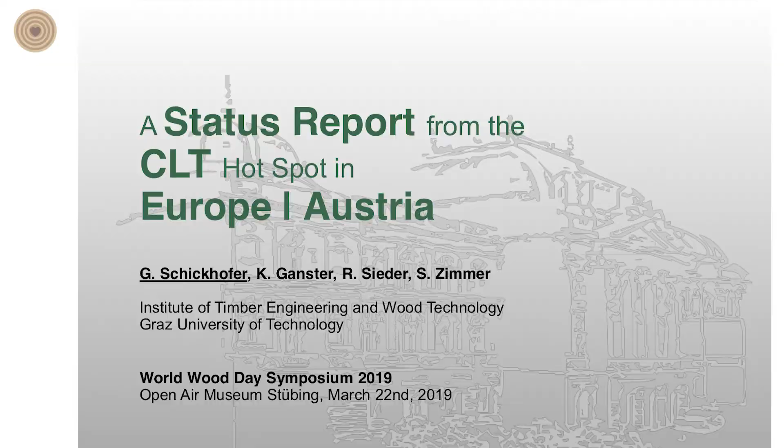I would like to show you the content of my presentation. First, I would like to talk about timber at Graz University of Technology, some R&D topics, then a few facts and data about CLT. Then I'd like to show some selected projects regarding the use of CLT, standardization work, and also what we are doing currently on different projects. Last but not least, I would like to make a summary on future prospects.

When I talk about the University of Technology, we have to consider that we have 7 faculties at our university, with approximately 14,000 students and a staff of 3,350. The current budget is in the range of 225 million euros.

Our Faculty of Civil Engineering and Civil Engineering Sciences consists of 15 institutes with approximately 1,400 students, and one of these 15 institutes is my Institute of Timber Engineering and Wood Technology. This was founded as Chair for Timber Engineering in the year '91, and then in 2004 we became the status of an Institute of Timber Engineering and Wood Technology.

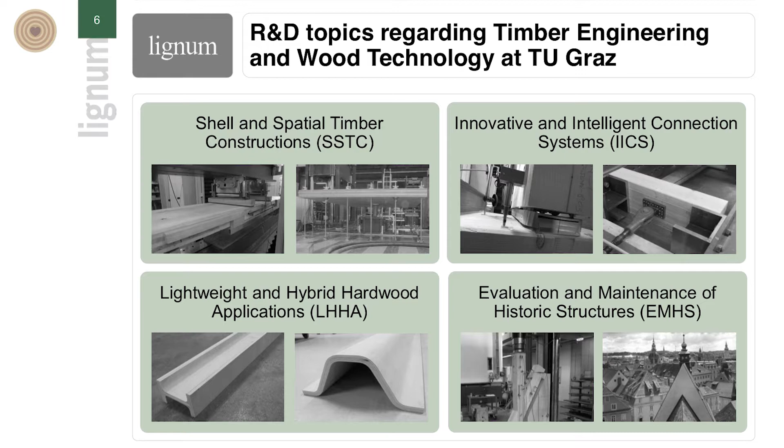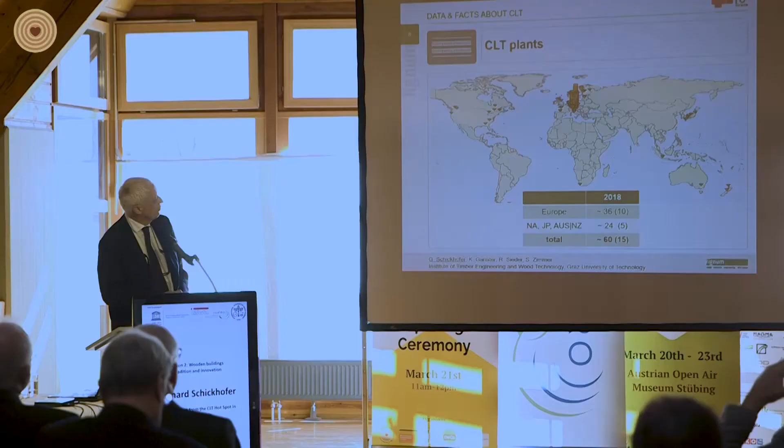Now let's talk about CLT—a few facts. Regarding CLT plants, currently we are talking about 60 plants worldwide, and 15 of these 60 plants are in process or in planning. You can see this focus of this hotspot here in Europe.

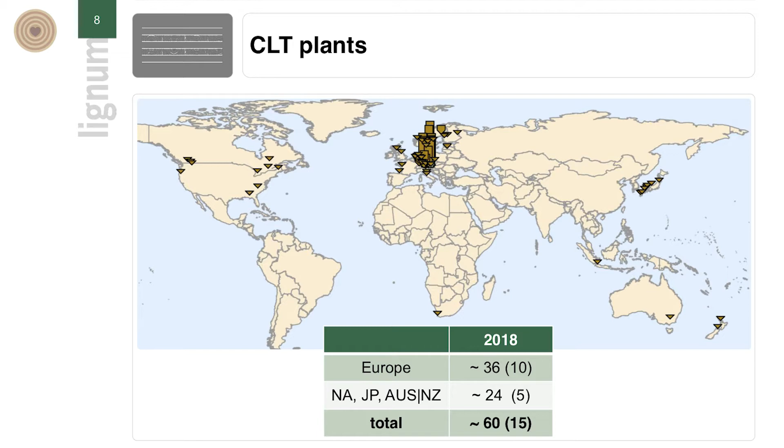The CLT production amount is really fast increasing now. In the early '90s we had kind of a niche product, then we had the market entry of KLH between 1995 and 2000. One of the most important facts was the market entry of different producers in Austria between 2005 and 2010—for example, Stora Enso, Binder Building Systems, and Mayr-Melnhof. I think currently we are in a status where we can talk about a mass product now.

In 2018 we reached this 1 million cubic meter production amount, and sooner or later, I think, we'll also reach this 1.25 million cubic meter production amount of CLT by the end of 2020.

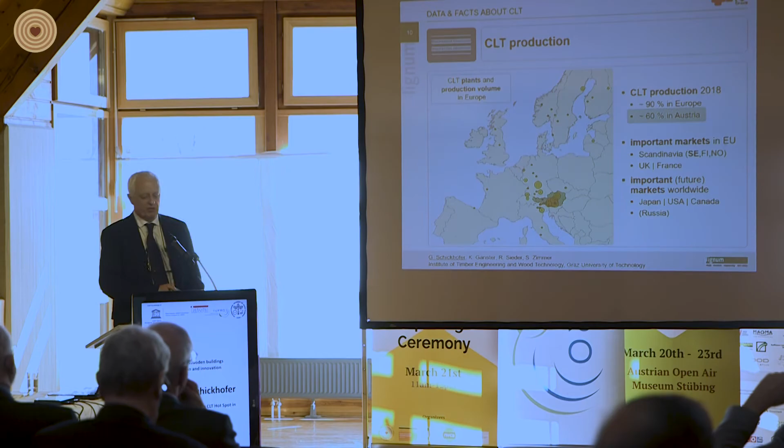Now, what's happened in CLT regarding the production situation in Europe and worldwide? You can see this hot spot here in the German-speaking countries. The current situation is that we have 90% of the whole production in Europe, and 60% in Austria.

For us, important markets in the European community are Scandinavia, especially Sweden—we have a lot of activities there—also Finland and Norway, and of course the UK and France. Important future markets worldwide, here we can talk about Japan, USA, and Canada.

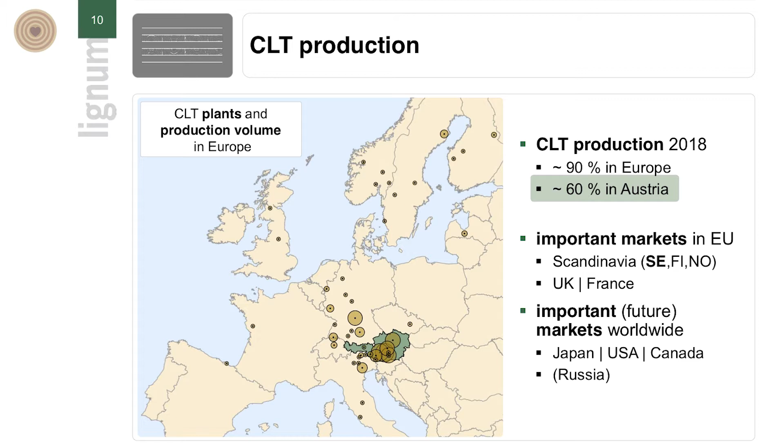I was in Japan two weeks ago, and it was really impressive. They are really on a fast forward way to also implement CLT production lines there. And we are also in contact with Russian companies.

Now let's talk about CLT, and I'll also explain the shortcut of CLT. But first, let's talk about the standardization work. Why do we need standardization work on cross-laminated timber? This is important because we have to consider a wider use of CLT products in our building sector.

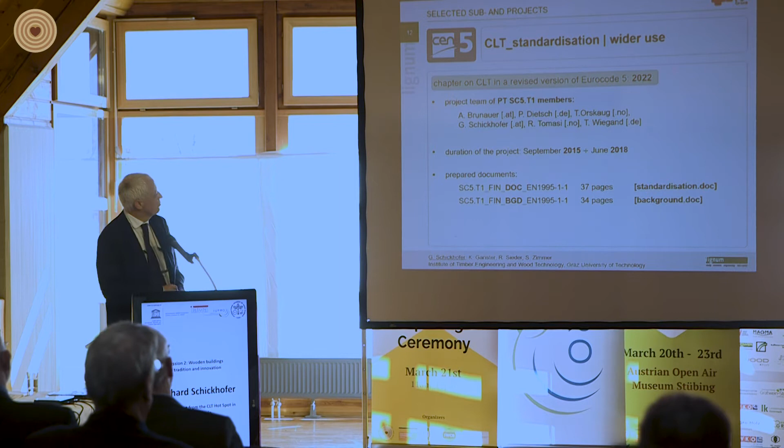The European community decided to have a chapter on CLT in a revised version of Eurocode 5 in the year 2022. That was the reason why a project team was founded, consisting of 6 colleagues - 2 from Austria, 2 from Norway, and 2 from Germany. They prepared 2 documents, a standardization document and a background document. All in all, we are talking about 70 pages with explanations and important information for engineers and architects on CLT.

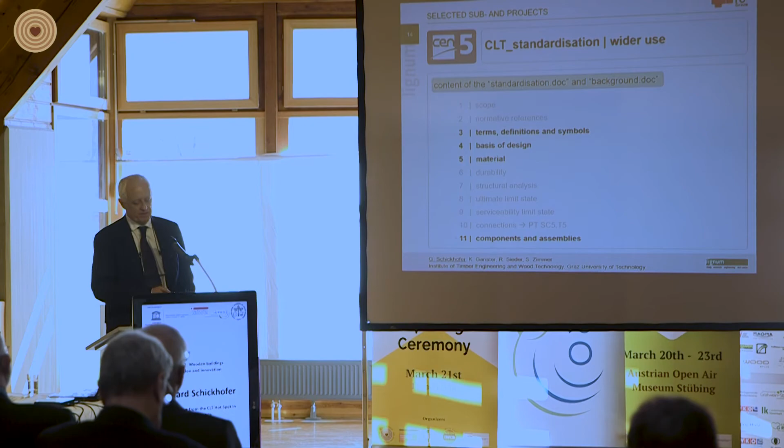Now I would like to talk about 4 chapters in a bit more detail: terms, definitions and symbols; basis of design; material; and components and assemblies.

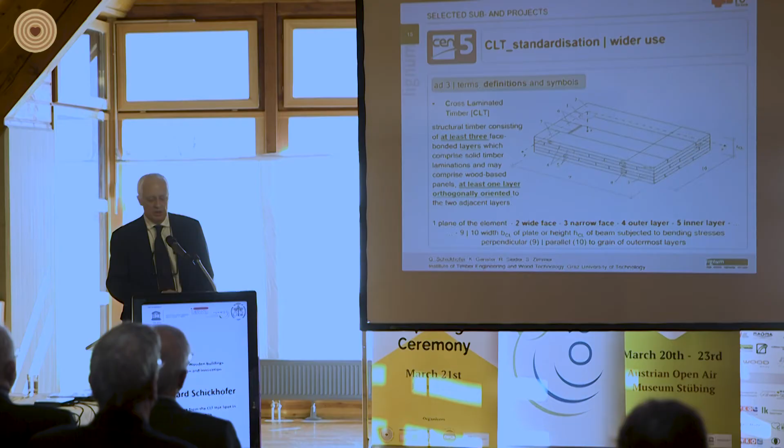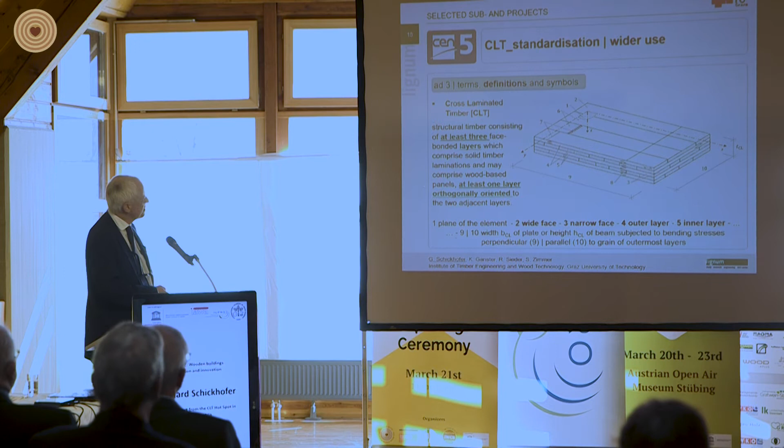Terms, definitions, and symbols - what is CLT now? Cross-laminated timber is a structural timber consisting of at least 3 face-bonded layers which comprise solid timber laminations and may comprise wood-based panels, with at least 1 layer orthogonally oriented to the 2 adjacent layers. What we can see here is the wide face, the narrow face, and we also have outer layers and inner layers.

So what is important for the engineer? For the engineer, we have 1 chapter called Basis of Design - this is really important to know. We have to consider a safety partial factor in the European standard called gamma M for CLT, which is in analogy to GLT, and we choose this factor as 1.25.

Then, regarding the materials, for ultimate limit state design we also have to consider load duration and moisture influences on our product. We use the K-mod factor, the modification factor, which is really important, and this is also in analogy to glued-laminated timber.

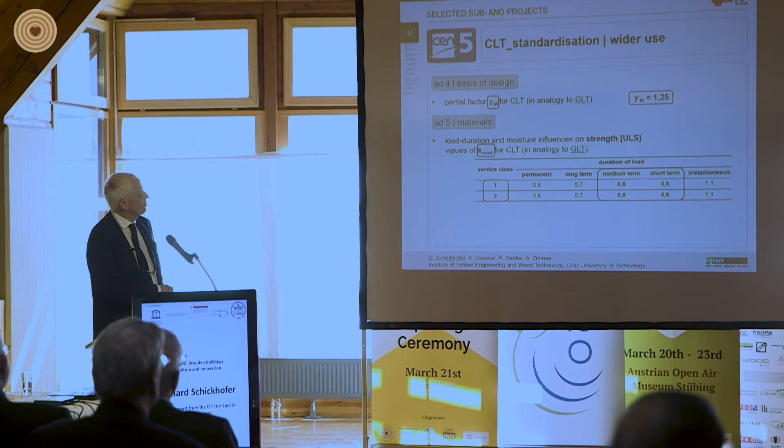We consider service classes and duration of load classes. For medium-term and short-term loading classes, we have a factor between 0.8 and 0.9, which is a modification and reduction factor of strength values. Then we also have to consider load duration and moisture influences on deformation.

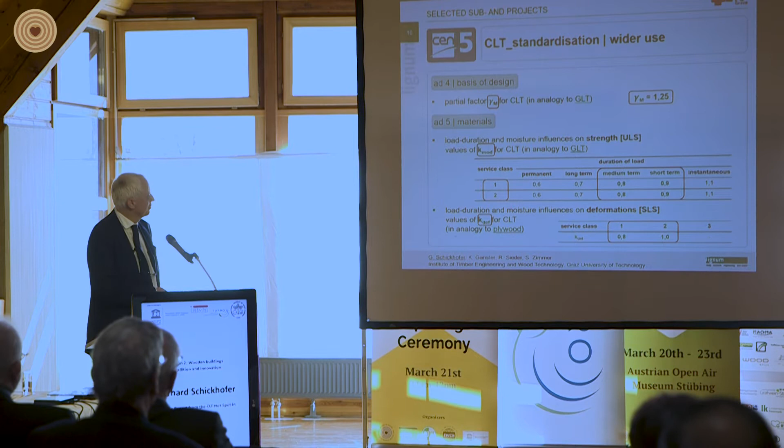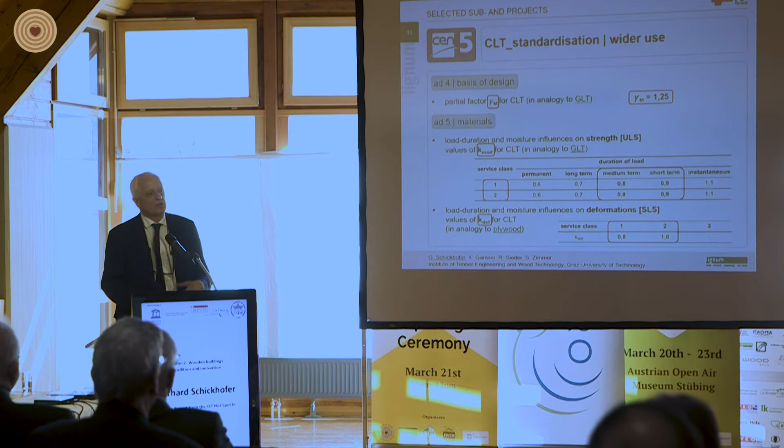This is a serviceability limit state process, and here we have the K-def factor. The K-def factor is in line with plywood - this makes sense because plywood is also a product with orthogonal layers, so deflection is more or less similar to CLT. In fact, in the US or Canada, CLT is very often named jumbo plywood - that's a really interesting wording.

Here we have this deformation factor, also considering or depending on service class 1, 2, and 3. We have factors between 0.8 and 1.0, which relates to deflection based on creep.

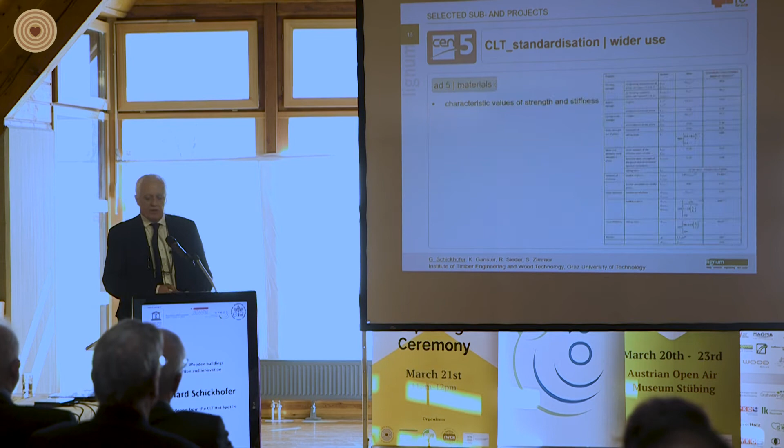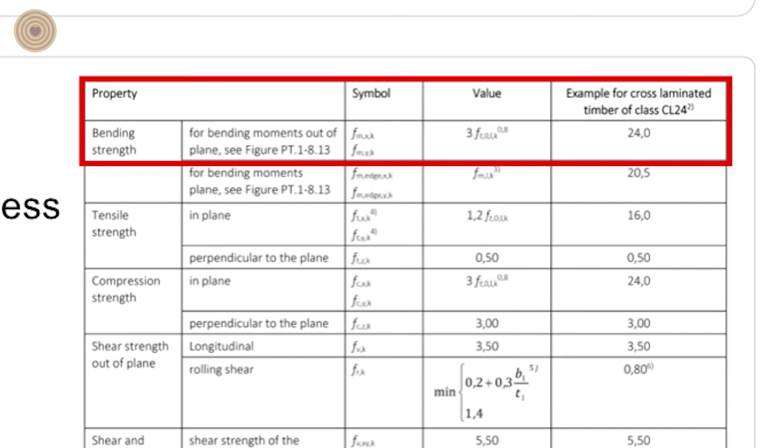Now some words about materials. When we talk about materials, we have to consider a strength class system - this was a very long open question for CLT. In the new standard, you will find all the characteristic values in a very important table of strength and stiffness values. You can see it here.

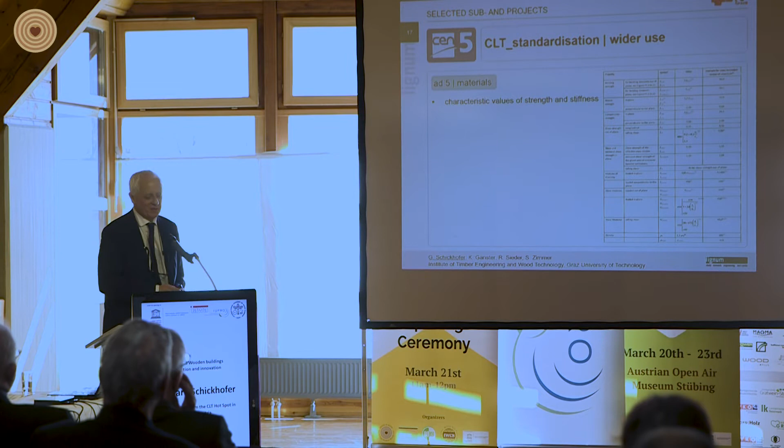I'm not able or willing to explain all these values in detail, but I would like to focus on the bending strength. This is the most important characteristic value when we talk about the strength class, because the definition of a strength class is given here. We call our strength class system in Europe CL24 - CL means cross-laminated, and 24 means the bending strength out of plane.

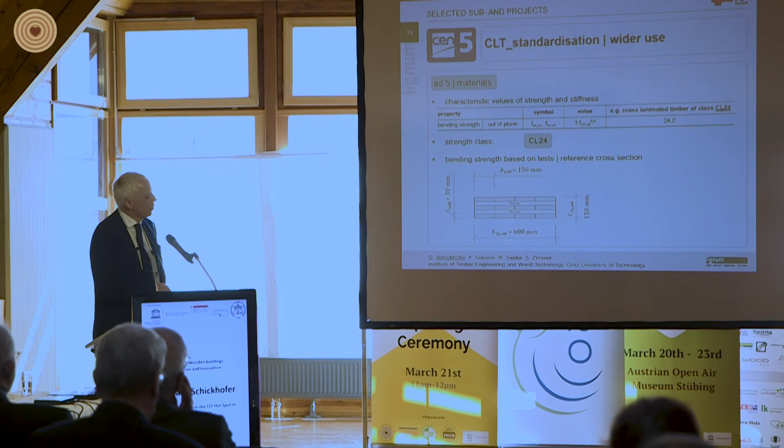How can we get this information? We have to do bending tests on our reference cross-section, which is given here with a width of 600 millimeters, a minimum of 4 laminations acting parallel, and a height of 5 times the reference thickness of 1 lamination. This is the reference cross-section, and if we want to know the capacity of a panel, we have to perform this test on this reference cross-section. The other possibility is to use a load-bearing model, which is very common in different product standards.

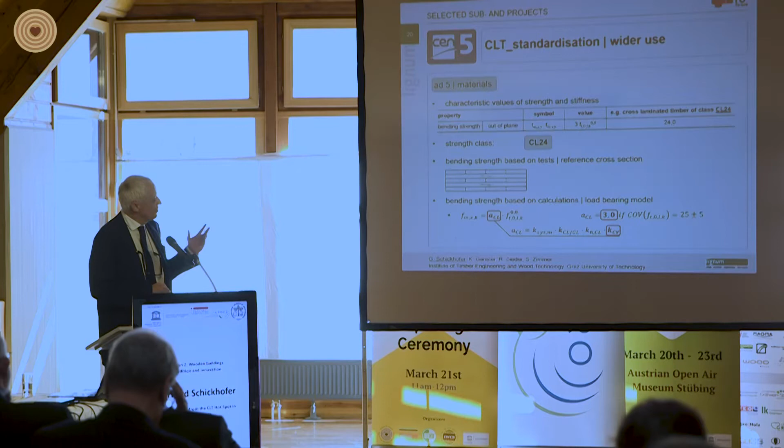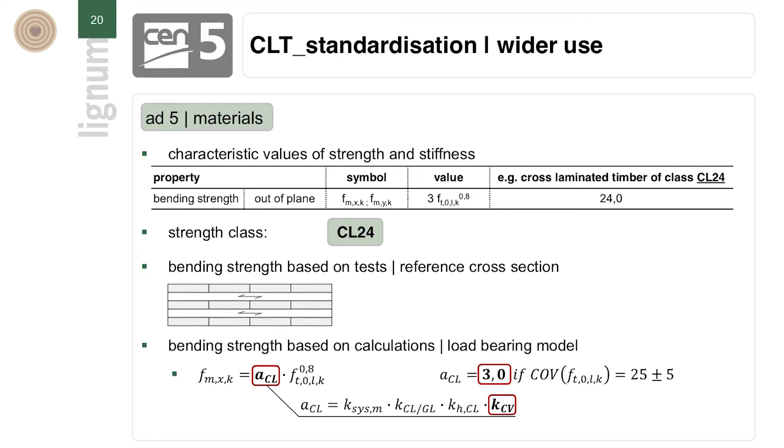This load-bearing model is, in principle, very simple because it is based on the tensile strength of the board with an exponent of 0.8, multiplied by a prefactor ACL. This factor ACL depends on different K factors, which I cannot go into detail about now due to lack of time. But if you look at this column, you can see there is the formulation: 3 times the tensile strength with an exponent of 0.8 is also one possibility to get the bending strength of your panel. So you can do tests, or we can calculate it with this load-bearing model.

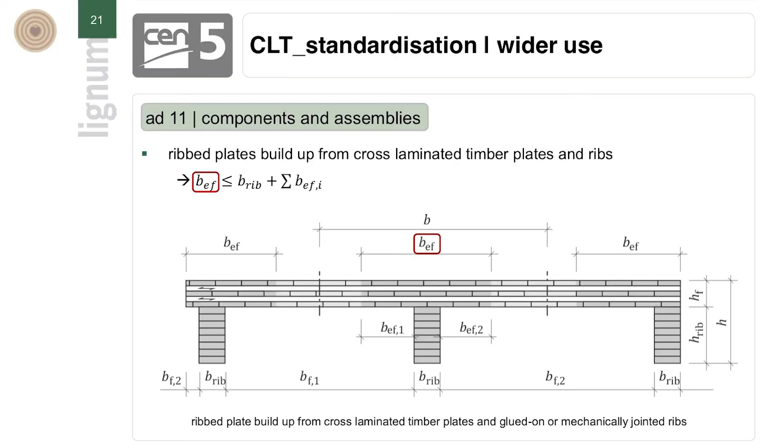Now I would like to focus on one component and assembly element, because this is, in my view, one of the most important elements, currently also on our table, since we have to do further research on this kind of hybrid element. It's a so-called ribbed plate built up from cross-laminated timber, combined with ribs. These ribs are normally glue-laminated timber.

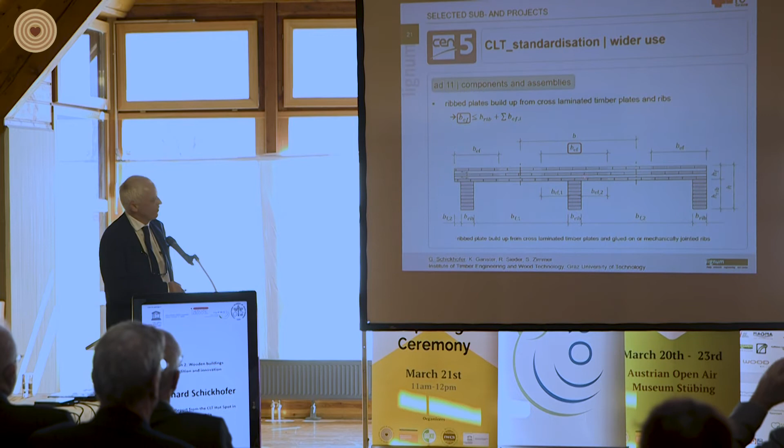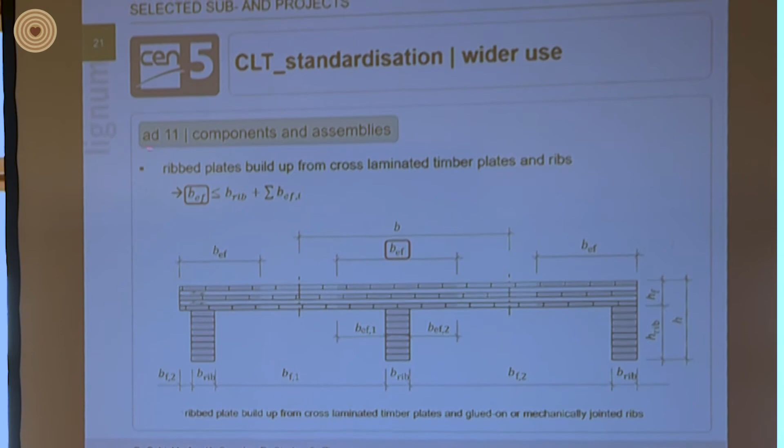What we have to consider for the calculation process is an effective width, and this effective width depends on the rib, on the width of the rib, and the effective width on both sides of the rib. You can calculate this formulation based on chapter 11, where you can find all the details on how to get these effective width values.

Why is this so important for us? Because there is one very important fact: currently we are looking for a wider use of different systems, and one very important fact is we have to have longer spans for our systems. When we talk about longer spans, we are talking about spans from 8 meters up to 15 meters and more. This, for example, gives you an idea of a ribbed plate.

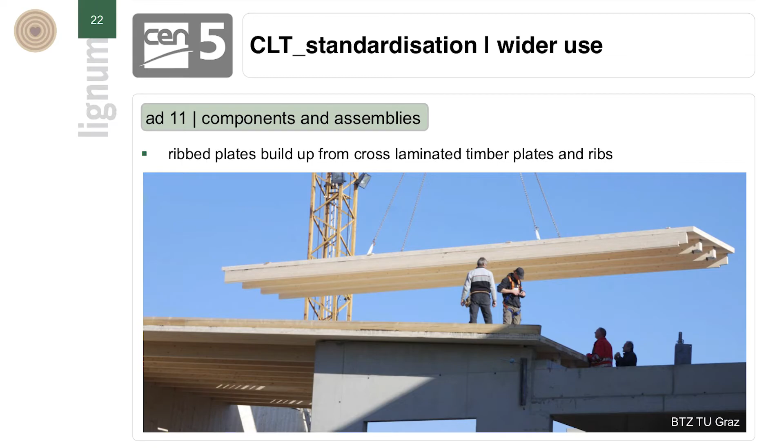This ribbed plate, for example, was used as an application for the roof system in our Building Research Center.

Now I would like to talk about another topic which, in my view, is a future topic: Prefab Modules. For me, this is one very good possibility to use such modules for densification processes in our cities.

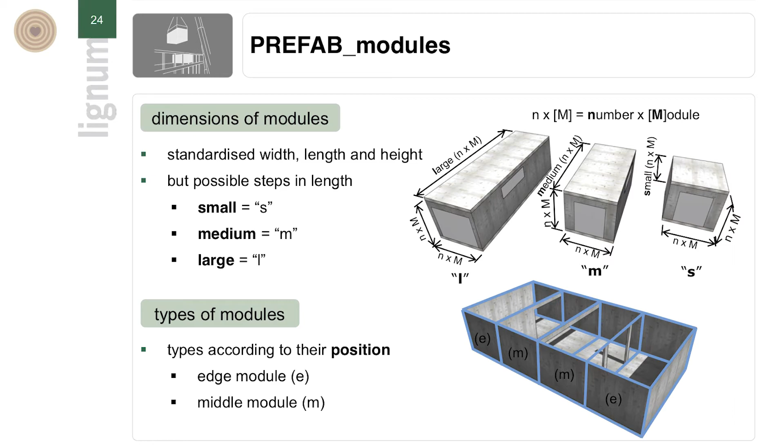Prefab modules are prefabricated room cells or shelters based on CLT. When we work with these modules, we need a standardized measurement called a module, which can then be multiplied by a number. For example, if this fixed measurement is 3 meters, we might have a volume of 3 by 3 by 3 meters, and we can call this a small module.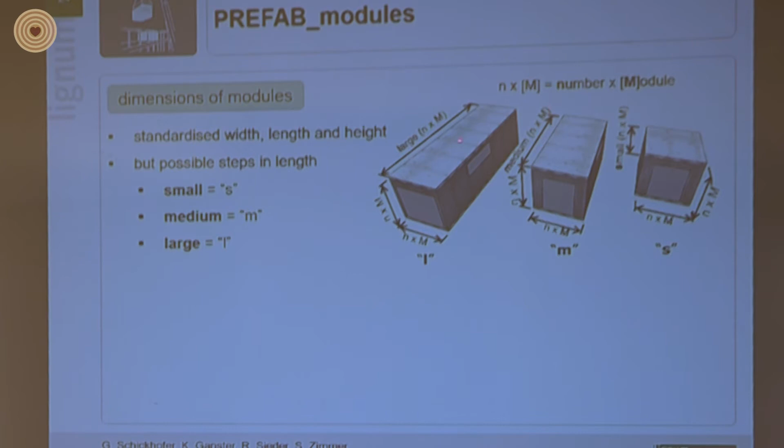With different lengths, we can have 2 times this measurement, giving 6 meters, or 3 times this measurement of 3 meters, giving 9 meters in length. We can take these possible steps and call them small, medium, or large.

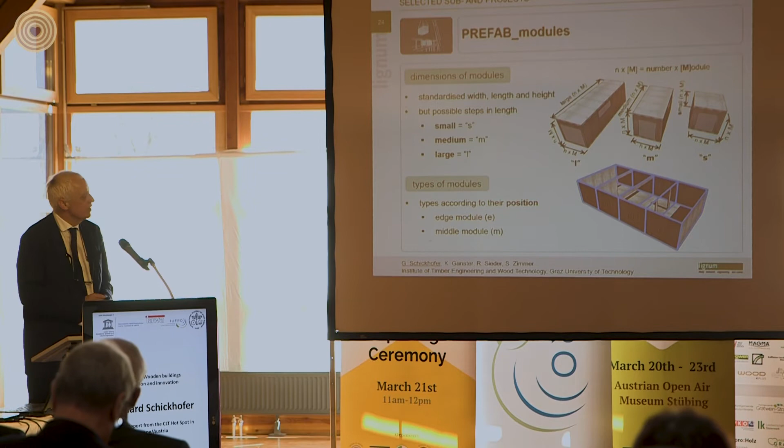Second, we have to consider different types of modules, differentiated by their position. For example, in one room we have 2 edge modules and 2 middle modules. Altogether, if we combine these modules, we can achieve a very interesting room configuration at the end.

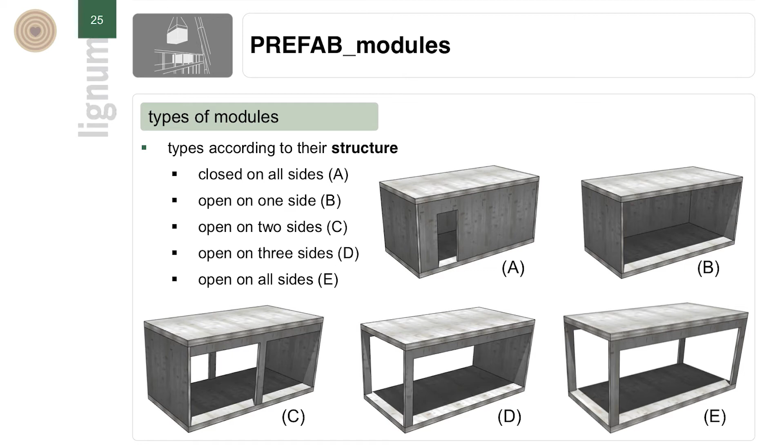Another type of module classification is according to structure: closed on all sides, open on 1 side, open on 2 sides, 3 sides, and all sides. We also have the possibility to use single modules and multi-modules.

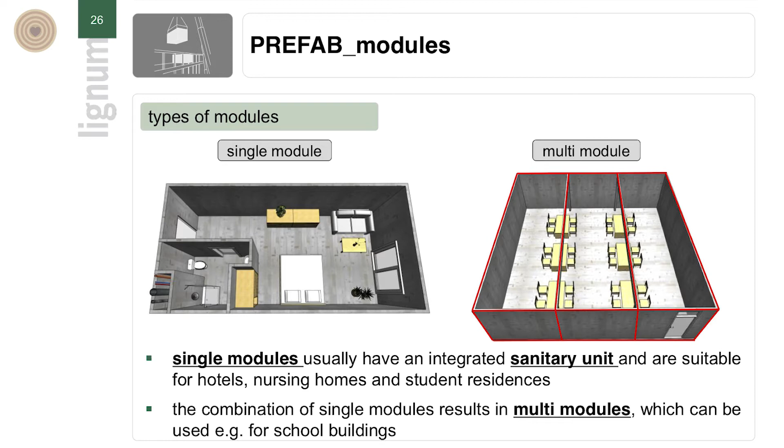A single module usually has a sanitary unit integrated into it, and it's suitable for hotels, nursing homes, and student residences. The combination of single modules results in multi-modules, which can be used for school buildings.

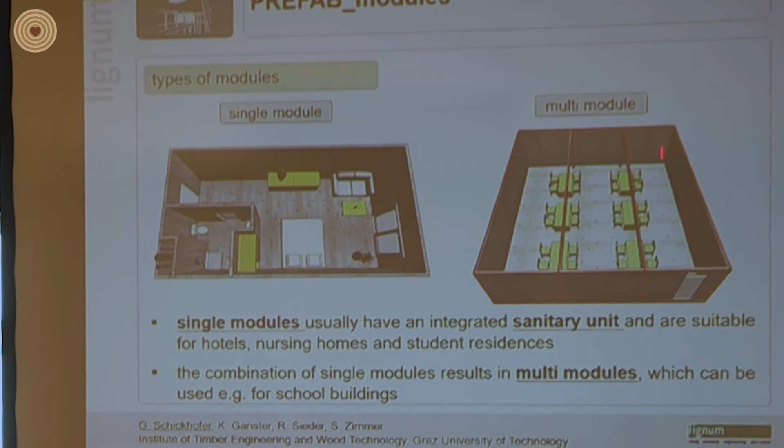For example, here you can see an edge module, a middle module, and another edge module. If this length is 9 meters and the width is 3 meters for each module, you have more than 80 square meters for this classroom. This is very common in Europe for classrooms now.

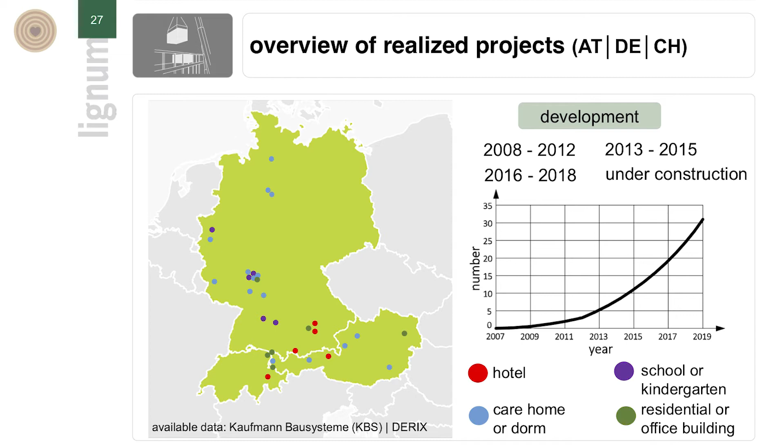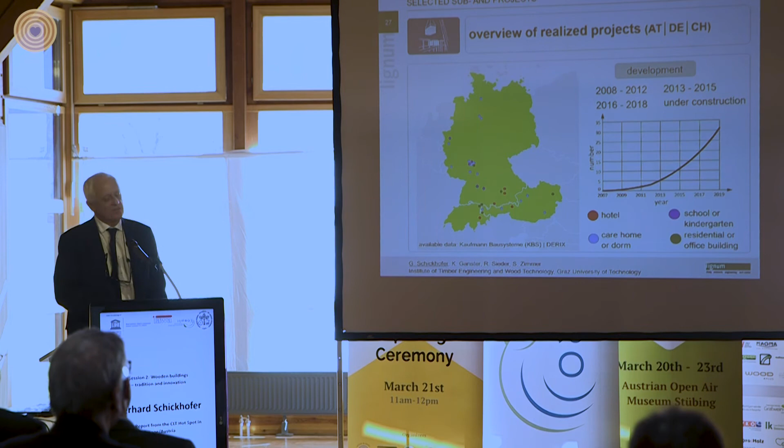Now I would like to give you an overview of realized projects in the German-speaking countries: hotels, schools and kindergartens, residential office buildings, and also care homes or student residences. I've only considered two companies working on this kind of modularization here, and you can see the developing process between 2008 and 2012. This was the starting point in Austria and also in Germany. Between 2013 and 2015, we had a lot more of these systems used for different projects. All in all, we also have projects in construction, and we can see there is a strong increasing factor in the use of this prefabrication.

This was the starting point here in Austria and also in Germany, and between 2013 and 2015 we had a lot more of these systems used for different projects. All in all, we also have something in construction, but we can see there is a strong increasing factor in the use of this prefabrication modularization concept in the building sector.

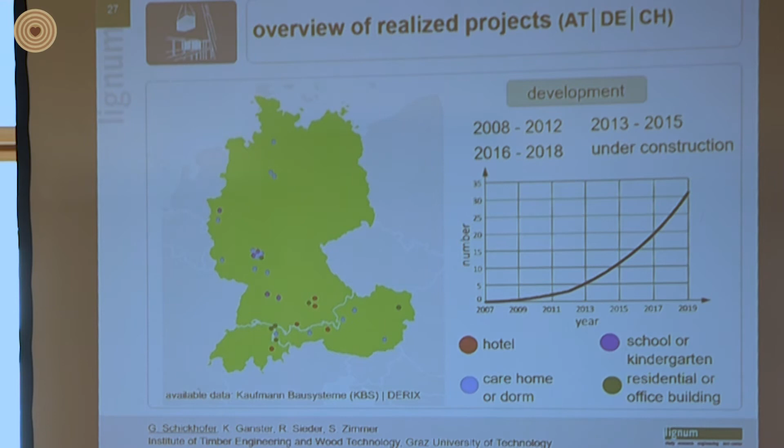So now I would like to go a bit more in detail. You can see now here realized projects: 2 hotels in Austria and 2 hotels here in Germany.

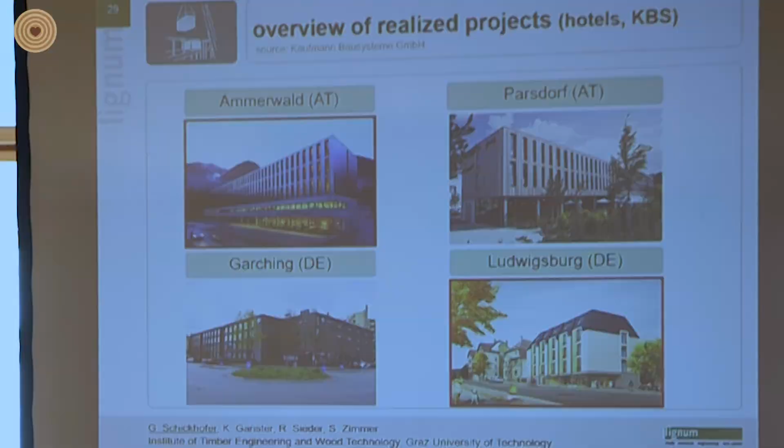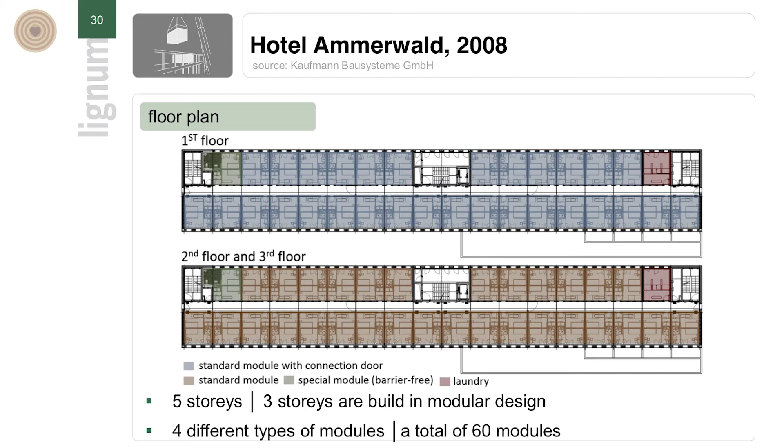Have a look on these floor plans, the ground floor plan. In case of Ammerwald, we have 5 stories, and 3 stories are built in this modular design, where we have 4 different types of modules, and in total 60 modules were used for this concept. You can see these 4 different modules, the blue one, the red one, and orange colored ones. For Ludwigsburg, we had 5 stories, and 4 stories are built in modular design, and 5 types of modules were used, in total 48 modules. But what is the problem?

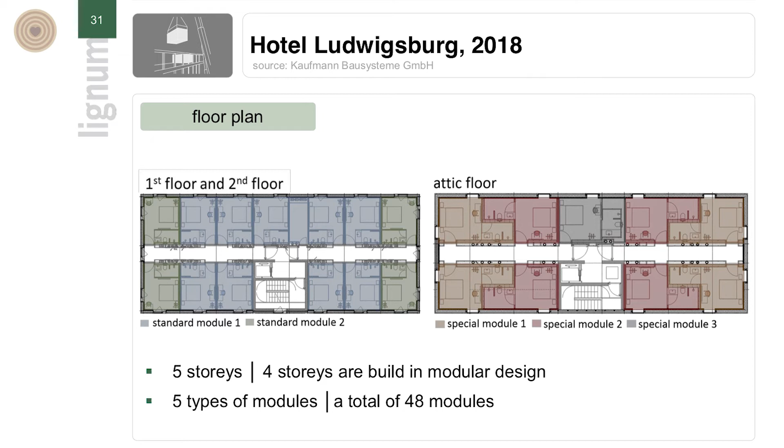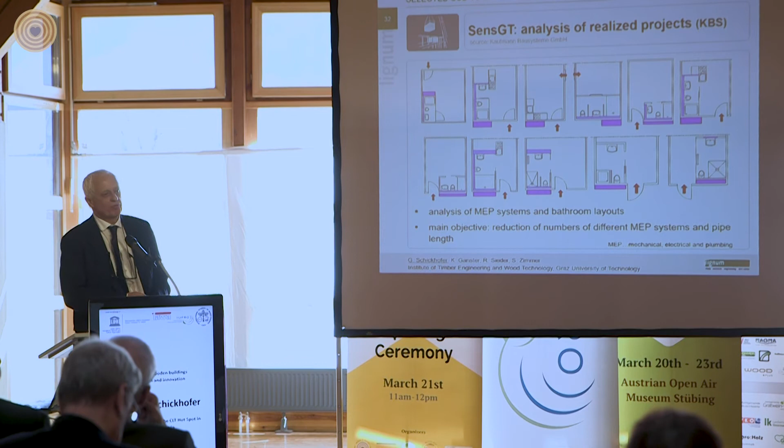We have also one very interesting ongoing project together with a company in Austria. It's called SensGT, which means sensor-secured building systems. Why is this so important? We have analyzed different projects, and you can see there are so many differences regarding the MEP system, mechanical, electrical, and plumbing systems, and bathroom layouts. And this is really a bit dangerous, because there are different types regarding the location of the shaft, different lengths regarding the pipes, the water-filled pipes, and perhaps if there are leakages, that could be a really big problem for water ingress inside the building.

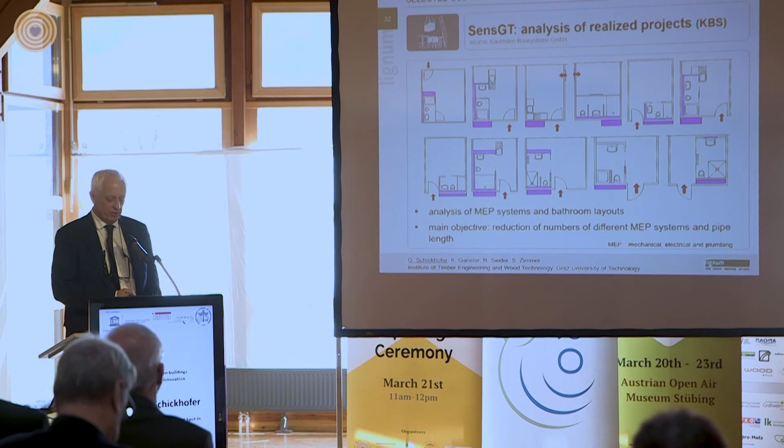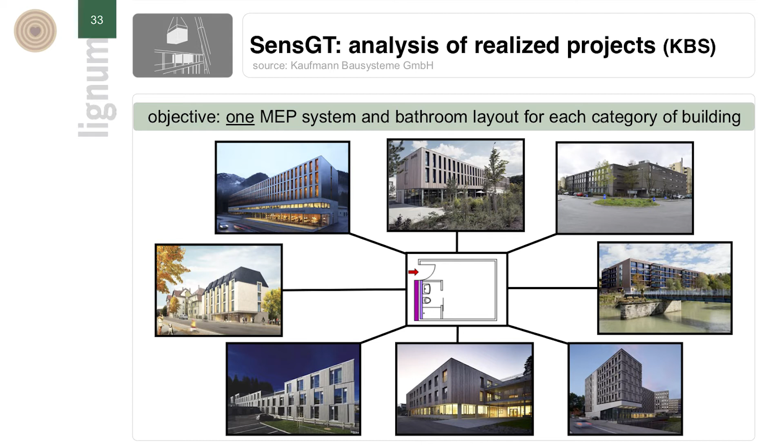The main objective of the project is, on one hand, a reduction of the numbers of different MEP systems, and also we like to reduce the pipe length. We like to optimize the system, and we are currently working on sensor-secured building systems. So at the end, the idea is to reduce our MEP system or bathroom layout to 1 for each category of building, perhaps 2. You can see one example: a very short pipe length to the shaft, which can be used for different kinds of hotels. This is one opportunity, and in my point of view a very important fact in the future, using CLT for this kind of projects.

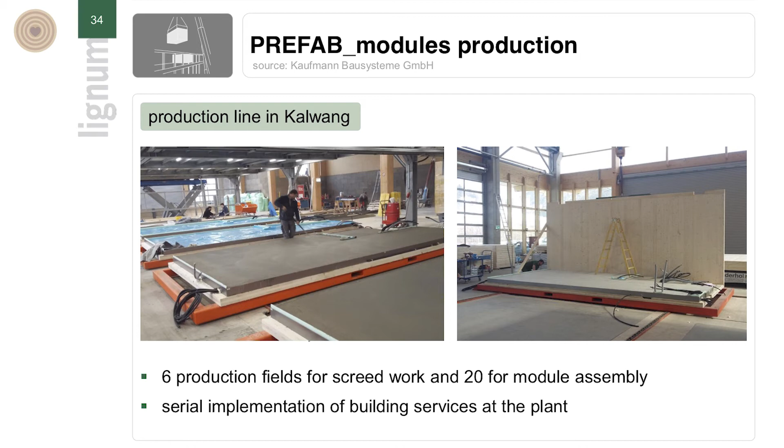Now let's have a look on this production situation. This is the production line of Kaufmann in Kalwang. This is a brand new factory where we have 6 production fields for screed work, and 20 for module assembling processes. So we are able to also implement building services at the plant. This is a very good opportunity.

The production amount is in the range of 6 modules per day, and the production per year is currently at 1,200 modules per shift, and the capacity is in the range of 2,400 modules if there are 2 shifts. And the production line started in February this year.

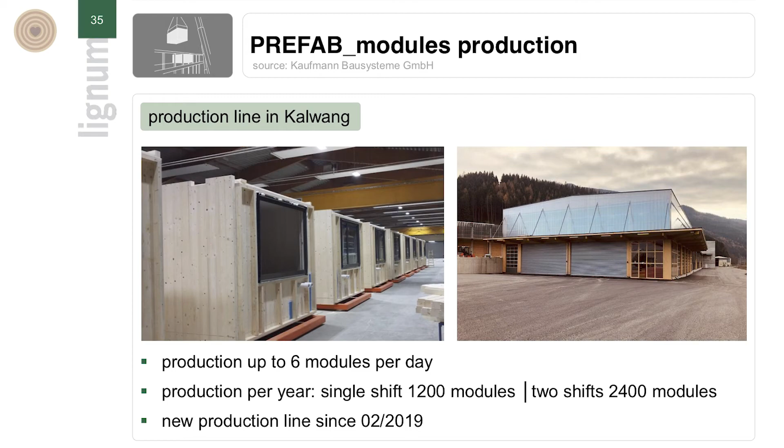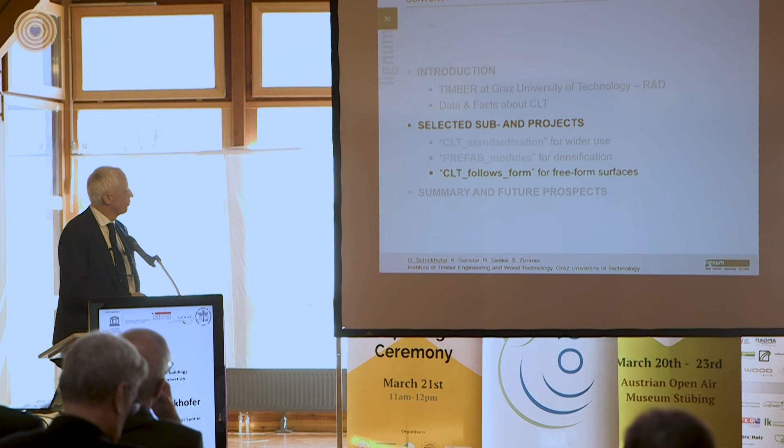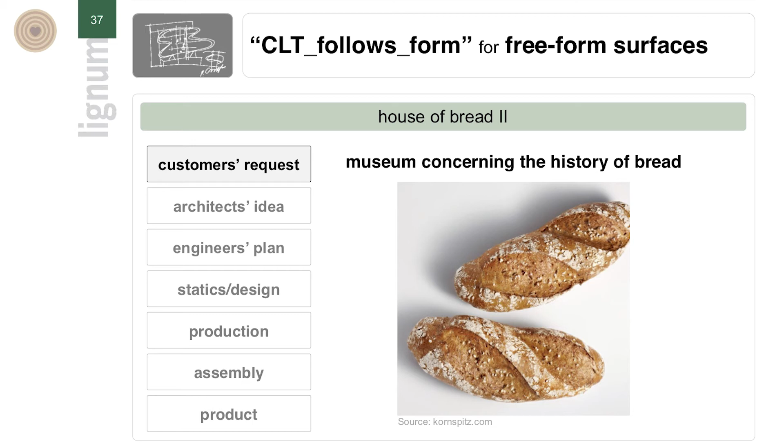Now I would like to finish with one very interesting project. It's called CLT Follows Form, for freeform surfaces. Here I would like to talk about the project House of Bread. It's a museum concerning the history of bread. The company is Kornspitz Company, and the owner of this company had a dream to have his own museum. This is also located very near to his factory. And the customer's request was this kind of a museum.

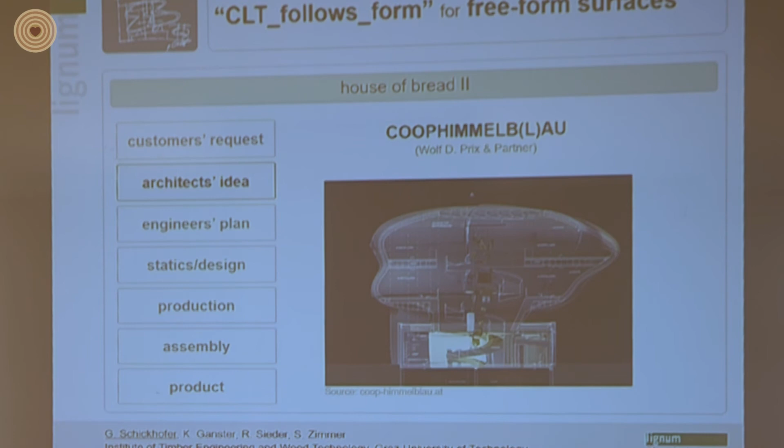This was the first idea of an architect, a very famous architect, Coop Himmelb(l)au, Wolf D. Prix from Vienna. You can see this shape looked like these 2 breads which was shown before, or you can also see a cloud. Next you can see the cross-section of this structure. So the first floor is a concrete floor with the entrance room and the shops, and the other 2 stories are fully built in CLT.

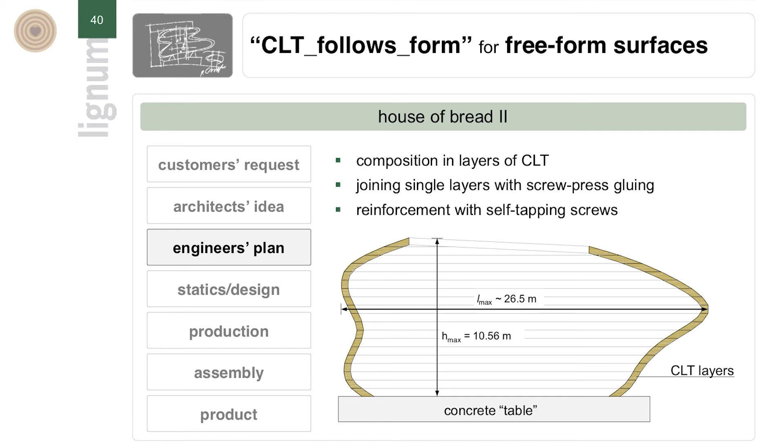This is the cross-section now, the engineer's plan, and you can see the decision was to use a composition of layers in CLT, and the joining between the layers was done by screw press gluing. The reinforcement was done by self-tapping screws. You can see the combination of CLT and innovative connection systems like self-tapping screws. The maximum height was approximately 10.6 meters, and the maximum length 26.5 meters.

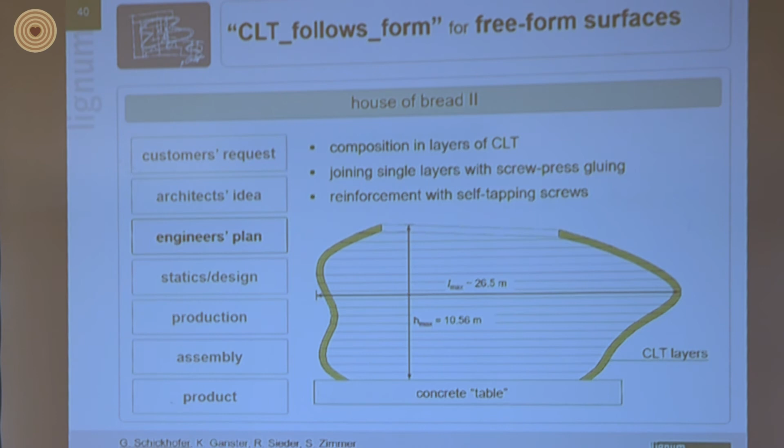The calculation was done by an office located in Upper Austria. They did a simplified model applying beam statics, and we had to do this validation by a 3D volume finite element analysis. At the end, we confirmed that both results were at a similar level.

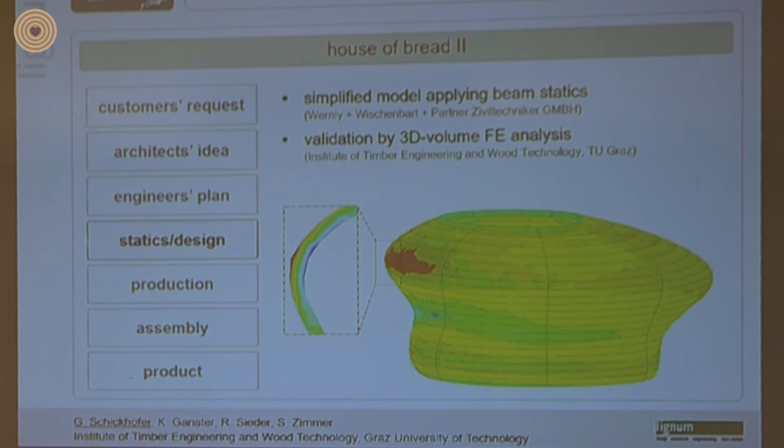You can see there are stresses, a peak of stresses here in this outer area of the building. But all in all, we can say the strength or the stress in this building was very low. And then we decided to give the okay to build the building.

You can see the production now. For the production, we used CLT raw material of 600 cubic meters with 3, 5, and 7 layered CLT elements. You can see these stacked elements here.

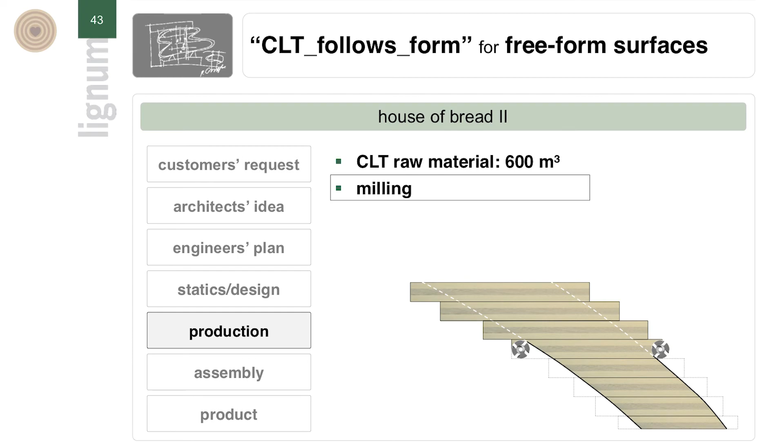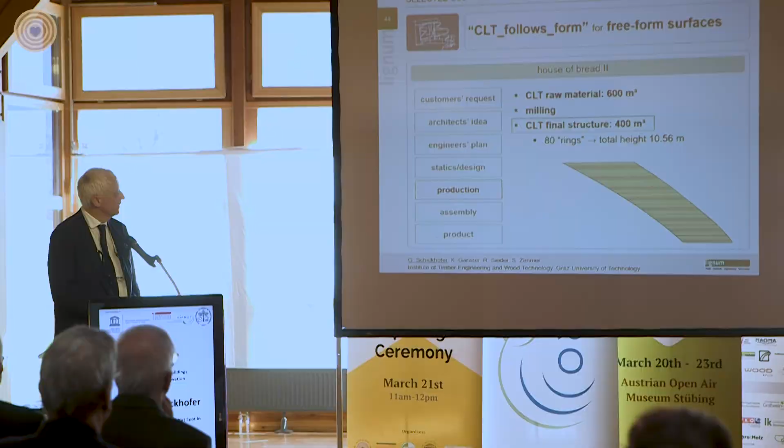Then we milled this cross-section to get the final shape on the outside and the inside of the building. At the end, we had a final structure of 400 cubic meters, consisting of 80 rings with a total height of 10.6 meters, and the width was only 40 centimeters for the whole building.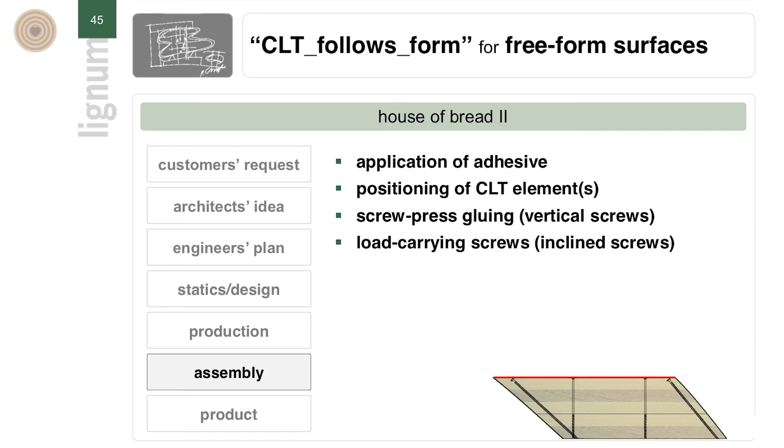We had to position these elements in the correct place, and then we had this screw press gluing to get the pressure between layer 1 and layer 2. Here is the glue line.

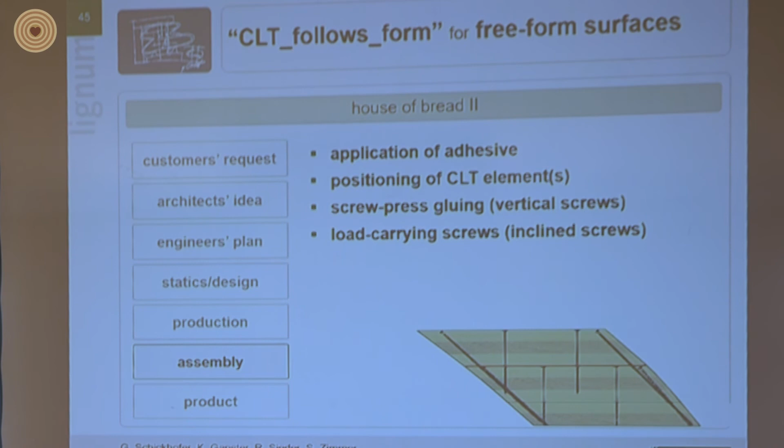Then we had these load-carrying screws, which are important for these normal stresses. And then we did it again and again and again. At the end, we used in total 120,000 screws, so the producer of screws was really happy with our project.

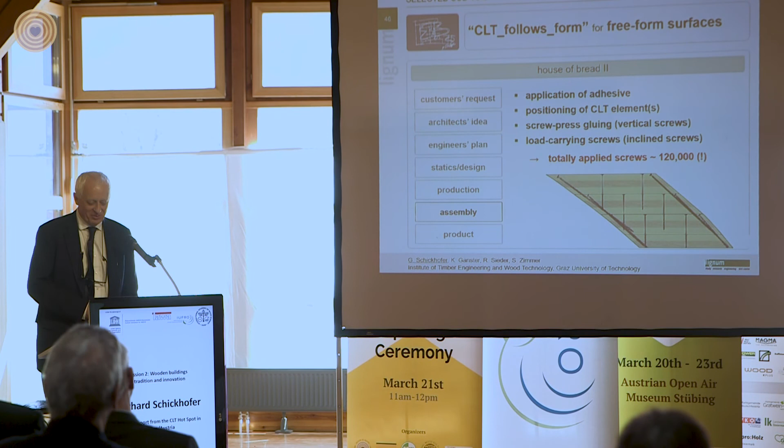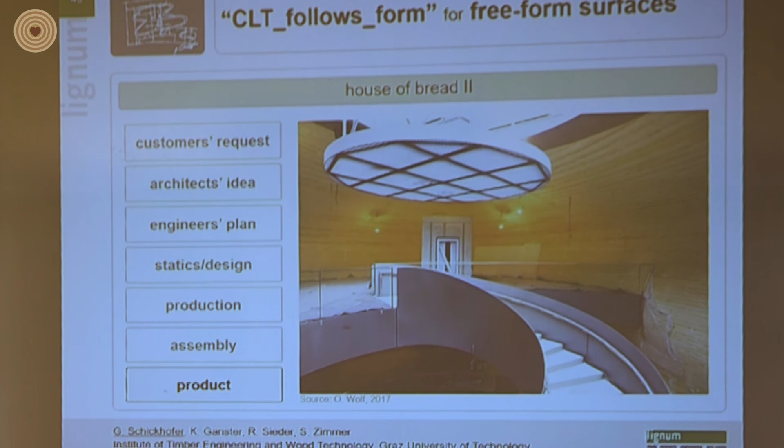I think it's a really fantastic shape - it's a free-form shape done by CLT. And if you go inside the building, it's a very nice shape. You can see these CLT layers very well. I can recommend you to visit this museum - it's really fine, it's a really nice museum.

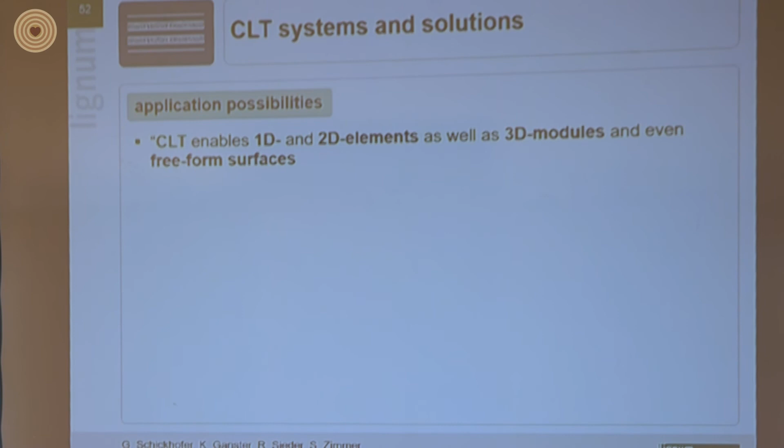Now, a short summary and future prospects. We have seen that the application possibilities are really different. We can use CLT for 1D and 2D elements, but also as a 3D module and even free-form surfaces. So, for example, this gives you an idea of beam and columns - it could be also in CLT.

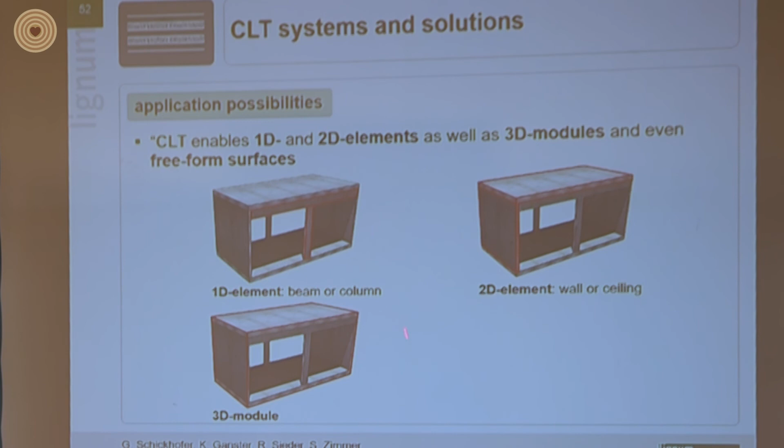Then we have these two-dimensional wall and ceiling elements. And of course I have also shown something about these 3D modules, and last but not least, we are also able to define free-form surfaces.

What are our new projects? Our new research or ongoing projects are on GLT, CLT ribbed plates. We need these systems for application in larger spans, and here we have to optimize the bonding pressure applied by self-tapping screws. This is really important to have an optimized bonding pressure.

Otherwise, at the end we're not successful using these self-tapping screws. And then we have to define suitable adhesives and also screw spacings. This will be transferred through a PhD, and also presented at INTER paper 2019.

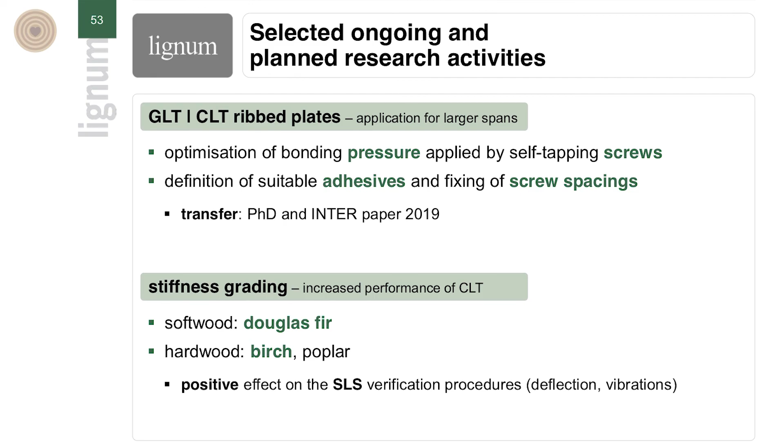The next project is also, in my point of view, an important one, because we always have to do something with stiffness - stiffness grading. We always talk about stress grading, but for us it's important to have a stiffness grading process to increase the performance of CLT. Here we are looking at different wood species in the future - for us, Douglas fir would play an important role, and also birch and poplar. This gives us a positive effect on the serviceability limit state verification processes, as higher stiffness is important regarding deflection and vibrations.

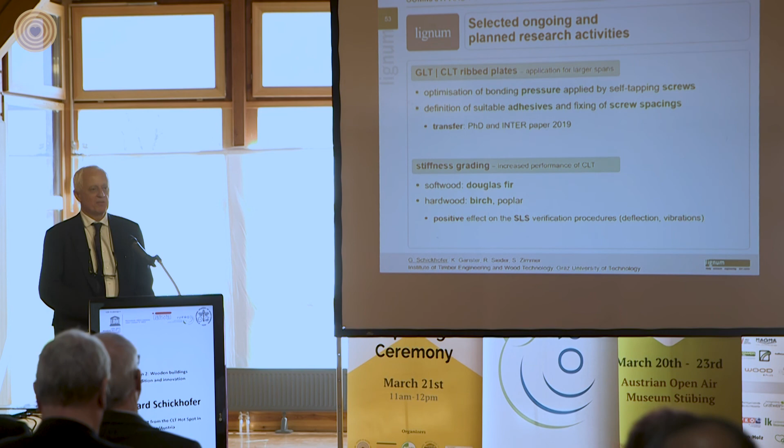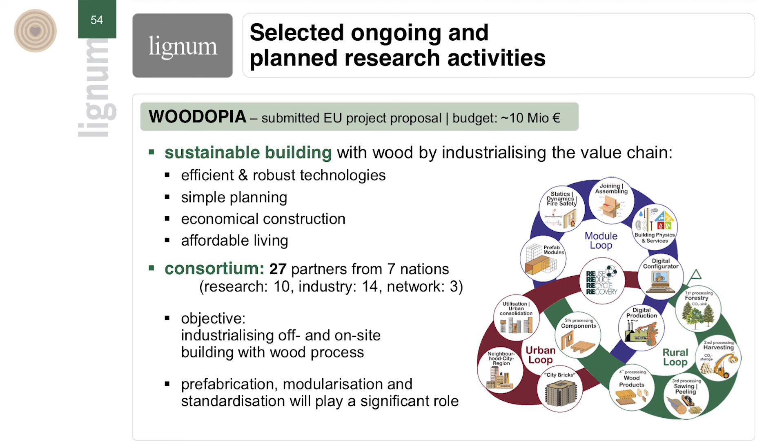Now, last but not least, my final slide is on a project called Woodopia. Why Woodopia? It's utopian to use wood in the city, but we should try it - we should use timber in our cities. We submitted a European project together with 27 partners from 7 nations: 10 from the research sector, 14 from the industry, and also 3 networks.

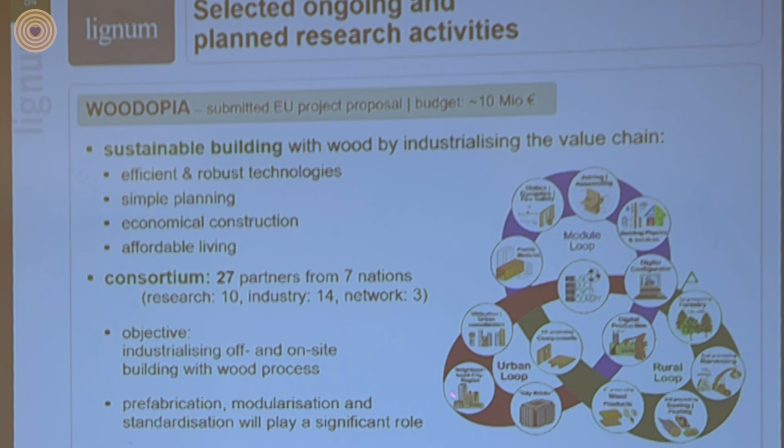The idea is to have this Woodopia infinite loop, which means we go from the forest - the rural loop - then to the urban loop, and then start again. It's an infinite loop. We have to do it again and again, reuse and redefine these products, and also consider the rural areas in our European community worldwide.

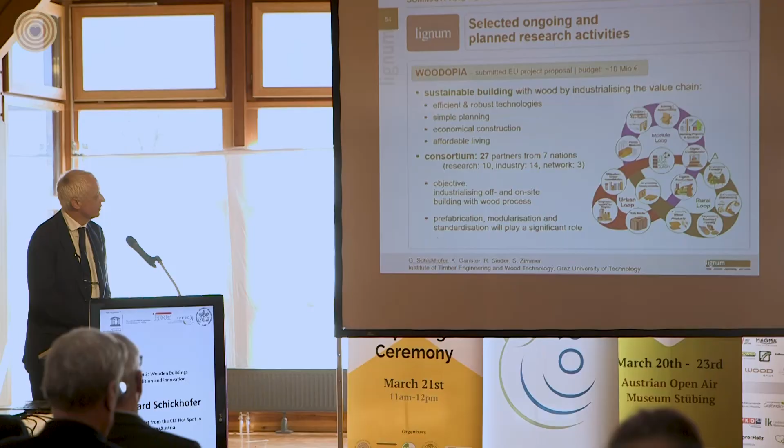So in my point of view, this is very important. We shouldn't only consider our urban developments - we have to consider our rural regions too. This gives you, in my point of view, a very good, short introduction to these projects.

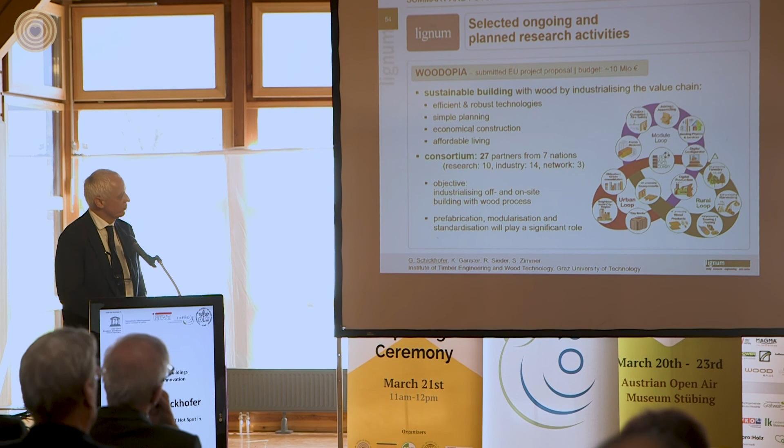The objective is to industrialize the off- and on-site building process, and a significant role will be played by prefabrication, modularization, and standardization work.